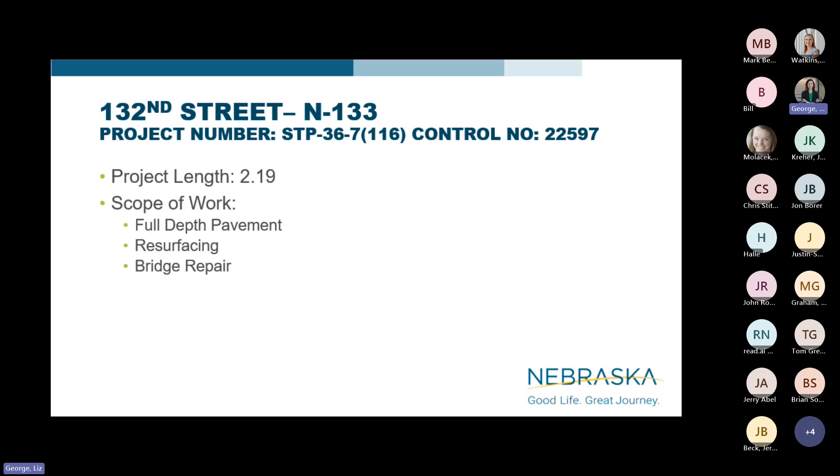132nd Street and N133. Looks like just a 2-mile project with full depth pavement as well as resurfacing and bridge repair. Potential conflicts would likely be with the full depth pavement, I think, on this one.

As you can see, we do have a number of utilities on this short project. I believe there's some culvert work on that project. Is there culvert work also?

The bridge over Thomas Creek, in the lower middle portion of that project, just on the south side of that S curve. I think we're doing some work down in the channel. Some culvert associated with that project as well.

Have to go back into the plans and stuff. But otherwise, everything from Thomas Creek to 133 is being fully replaced. And then everything to the west up through the curve is going to get resurfaced.

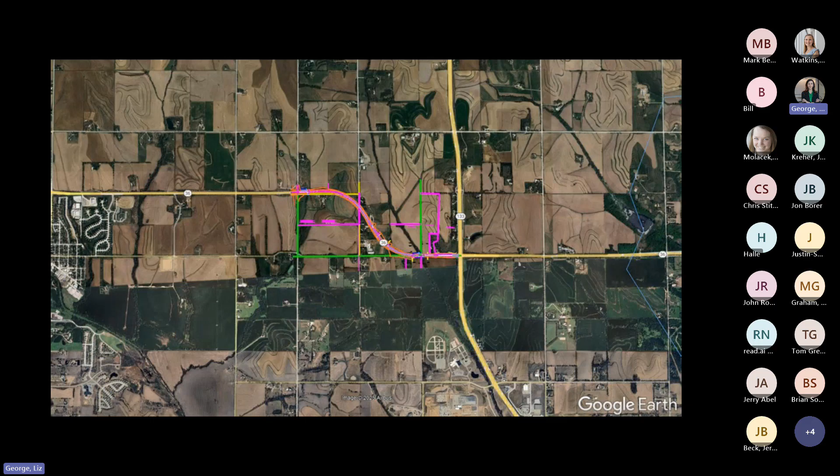This is Bill Wheeling. I apologize, I couldn't get to the meeting, but as Amy said, there's work in there. There's old piles, I believe, from an old structure. We're going to remove those piles out of there, and there was right of way on that project around that bridge area that we had to acquire for that work.

So, thanks Bill. Yep.

Next is D2. It's a high mast tower replacement project. So we've got ITS and lighting and grading. This one should be low impact.

I don't know if that one got updated. If you go to the map, is there? Looks like it. Okay. Oh yeah, this is the one that we updated because it includes...

3 intersections along 275. One up here further north on 275. And then there was one back here on 680, I think. Right, west, 680 West Center. Yeah.

Yeah, it said the first thing said 4 interchanges, but it's kind of... Yeah, because this one we just updated the other day to include those.

For those high mast tower projects, we're asking for really detailed locates. We have the ability, our contractor can field adjust the exact locations of where we have the foundations for the towers placed. We can move those around about 10 or 15 feet in any direction. So if you guys give us really good locates, we're going to do our best to plant our foundation where possible. But the new towers, they do have large foundations.

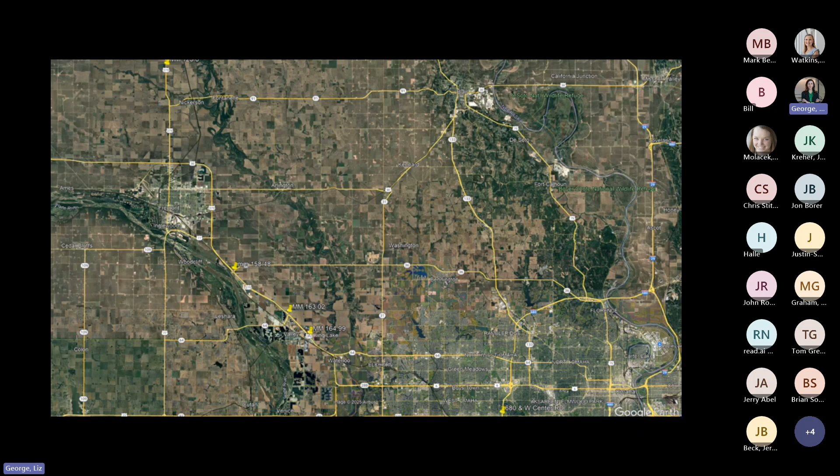Yes, the new towers have really deep foundations, about 8 feet. They're pretty big. I don't remember, 10 or 6 feet.

Specific to Dodge in Omaha, looks like we're 1.5 miles of full depth pavement. There's some grading and bridge repair. Be in the spring of 26. We do have a number of utilities on this one.

Is there a bridge replacement on this one also? Oh, this one. The last, Damon, do we have bridge repair and replacement or just repair?

The bridge over the Happy Creek just north of Pacific Street, just out of there, where that blue line is. That bridge is being widened in the northbound direction. They're only adding a single lane northbound, an additional 12 feet or whatever it is. That's the only work I believe that's being done on that bridge.

Short of any other maybe miscellaneous repairs, but we only prepared it and overlaid it recently, so.

But this is the one that's got the transmission line on the north end of it. Yes, this is the one that does have the transmission line over the approaches. Right, doing some modifications to our substructure.

And I think Kurt's still working with them on that, asking for that drop. OPPD has been working with us on how we're gonna handle that. It's that super high voltage transmission line that's serving a regional area.

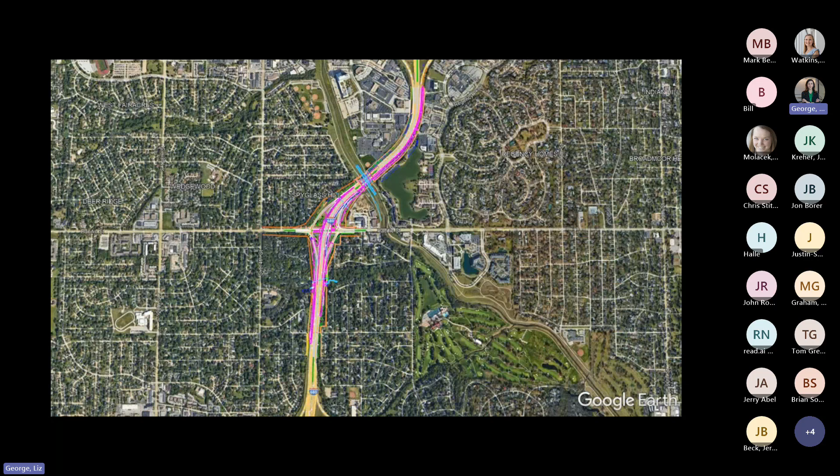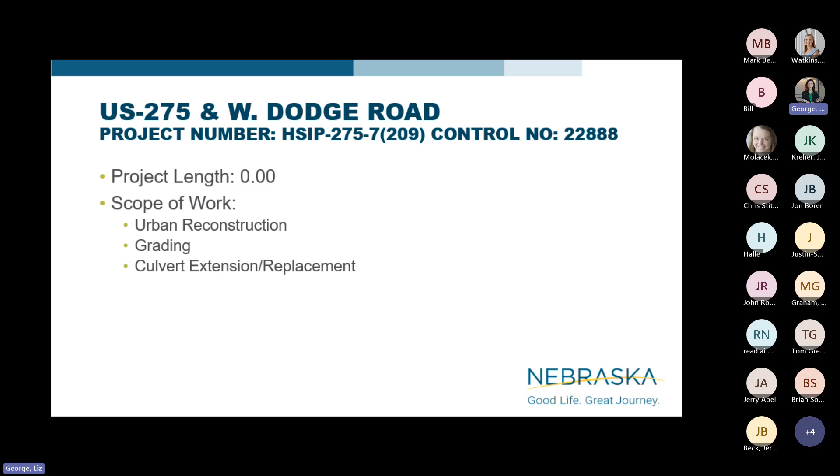Next, US 275, West Dodge Road. There is no length to the project yet. It's urban reconstruction, grading, culvert extension, replacement. We're going to be hitting that one late summer of '26. Not too many utilities on this one, so hopefully it should go pretty smoothly.

At West Dodge, there's going to be a roundabout at West Shores on the 275 and West Dodge, outside of town. I think we're actually looking to advance that potentially to give the contractor all summer rather than start in July.

Further in the spring, make sure we're on top of it, just to give them the most time. It's not anticipated to take a full season, but if we can start as early as possible and mitigate any weather issues, we're trying to do that.

Kurt Yeager is the District 2 utility coordinator in the office, so you should expect some correspondence from him about these projects if we haven't already talked to you about it. We'll get it to you soon.

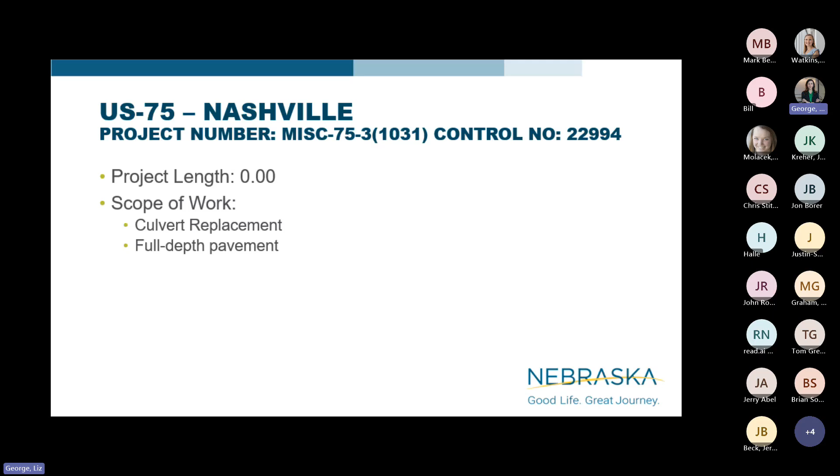This next project is a super exciting one. It's been added as an emergency repair very recently, a month or so. We had a washout situation where a culvert failed and there's going to be a need to rebuild it in a hurry. Unfortunately, there are a lot of utilities in the area, so we need to work together as quickly as we can to relocate your facilities.

It's not a huge area, but we don't have a map of it yet. It's certainly going to be high impact, and I think right of way is pretty tight there.

This is kind of a relic of the past. There's an old rail line adjacent to US 75, just north of the Washington-Douglas County line.

The culvert itself is just a small, I think 5x3 box culvert. It drains from both sides of the highway to just under the southbound shoulder, then goes into a chimney, like a collapsed chimney structure, and drains out into a creek using some old rail culverts. That vertical chimney structure is compromised and is causing significant washouts underneath the highway.

So that's why we're pursuing an emergency replacement. The hole itself has appeared twice within the last 6 months. It first appeared earlier this spring and then reappeared this past fall, right after Labor Day. So short of saying we get to next spring, this hole will reappear soon.

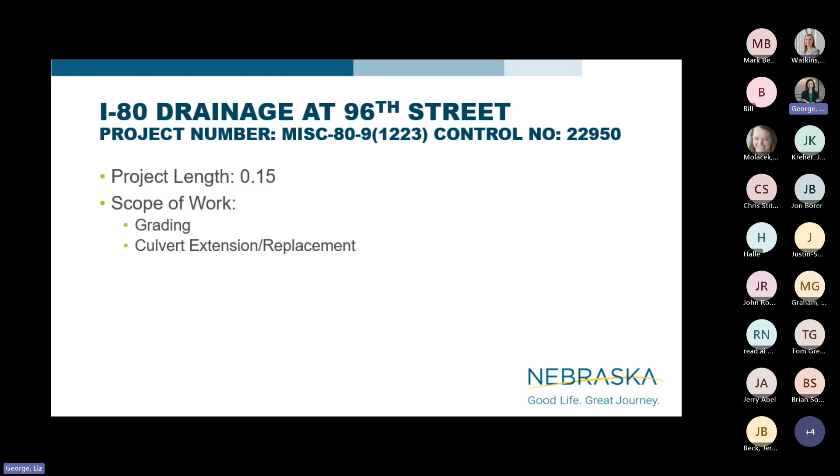Moving on to I-80 drainage at 96th Street. It sounds like we're going to do some grading and culvert extension replacement for the drainage, major grading, major drainage. This is another emergency project that the district is kind of pursuing.

We have some hangups with the railroad right now, but there is an exposed, compromised utility line up on the south end of the interstate, and we need to get this fixed as soon as possible.

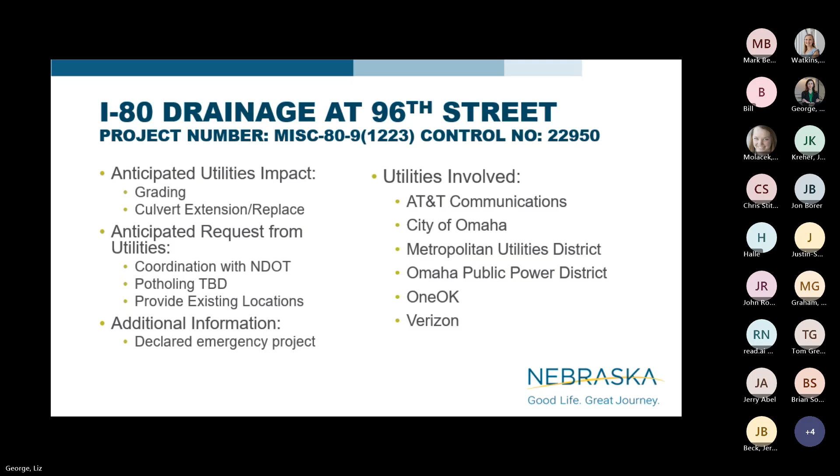That wraps up things going on in our next construction season.

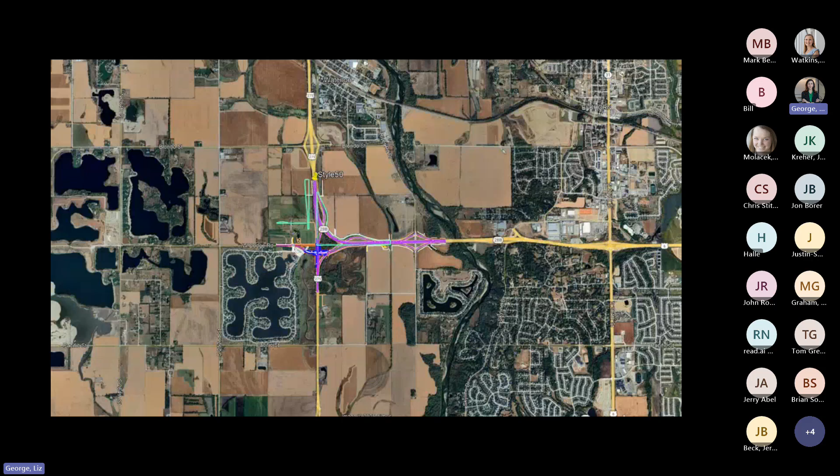Sorry, I have a lot of slides to click through. Up until Rawhide Road, so before Rawhide, yeah, there's only two.

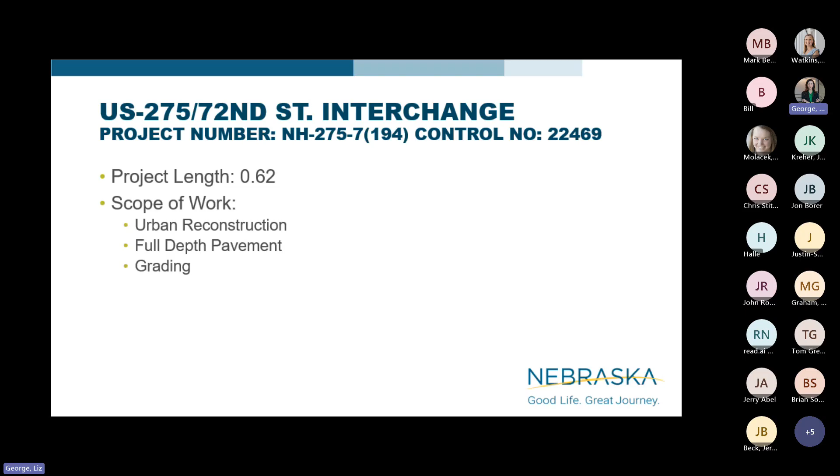The first one was US 275 and 72nd Street interchange. That's the one that's already started. The bridge demolition is scheduled in a couple weeks. Some extensive work is obviously happening with this one.

A lot of relocations have happened, some are in process. The second one was Millard Highlands along I-80, this is the noise wall along the north side of I-80, just west of Giles. That was the two.

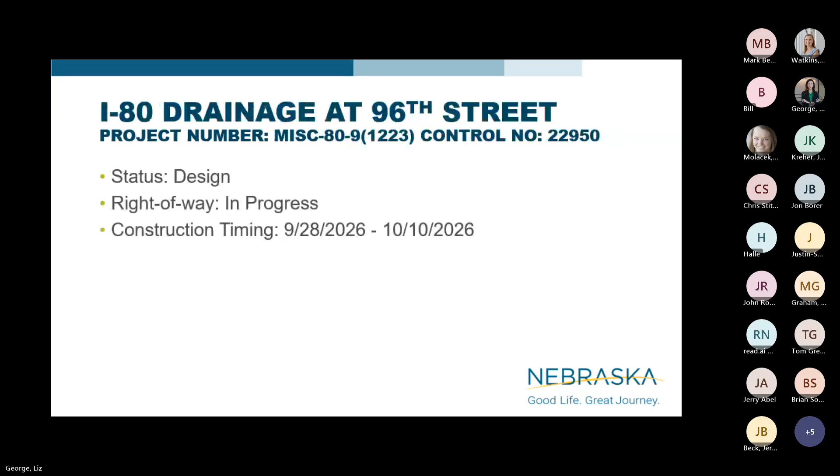I think the locations are relatively sporadic. I believe 370 has a significant portion, an amount of it. There was a lot of splice work that happened from the time we installed along 370 up until now, so I think that's restoring integrity to the line by putting new stuff in, getting it cleaned up. Other than 370, I think there's a handful.

Wherever we do have our fiber, we know you guys also have a lot of facilities too, so we'll be working with you to get coordinated on that.

Yeah, here's the map. You can kind of see the different areas that we're touching.

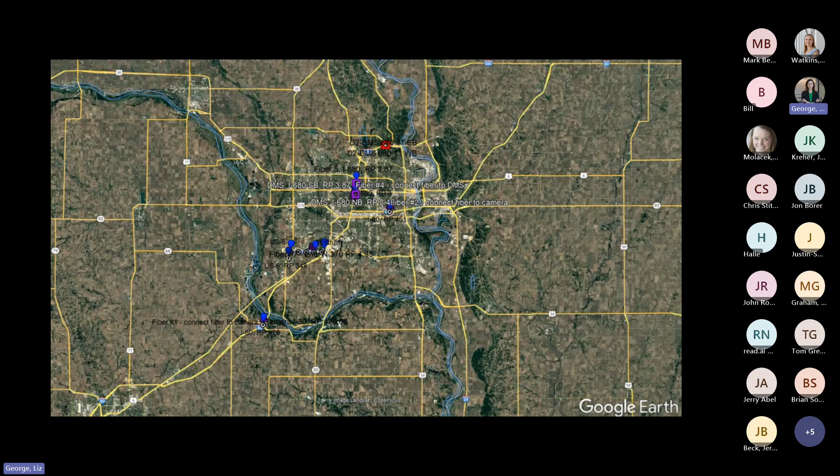Sorry, go back to slide 45. One more, one more, sorry. One more. Yeah, this one, that's 967. This one, there would be a little right of way involved. I have a note from Bill that says we had right of way on that one, but maybe that's not the right slide. No, it's not, this one doesn't have right of way. It was 22597, that was the one before.

132nd to N133. What Damien described about the bridge, we had right of way on that. That was a project a little ways back. This one won't have any right of way. Okay, sorry about that, Bill. Our slide numbers don't jive, I guess, so I'll be looking at these as we go.

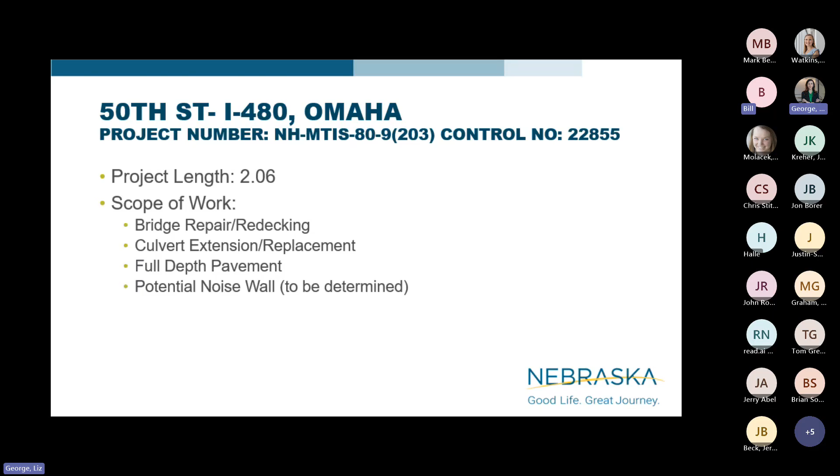Yeah, no worries, Don. This one, 50th and I-480, is a design build project that we have. So I don't know if things will be going on, I think there's going to be some tasks and that stuff going on at the same time since it's using that alternative delivery method. We'll know more about that as we progress with that project.

That's a good thing to note. Thank you, Bill. Design build projects are a little bit different than what we typically do. The design and the build kind of go more hand in hand and happen more simultaneously than our traditional way where we design a project, let it, and then it goes to construction. So it's bringing it all along at once. That's going to require a little extra attention to utilities as we move through.

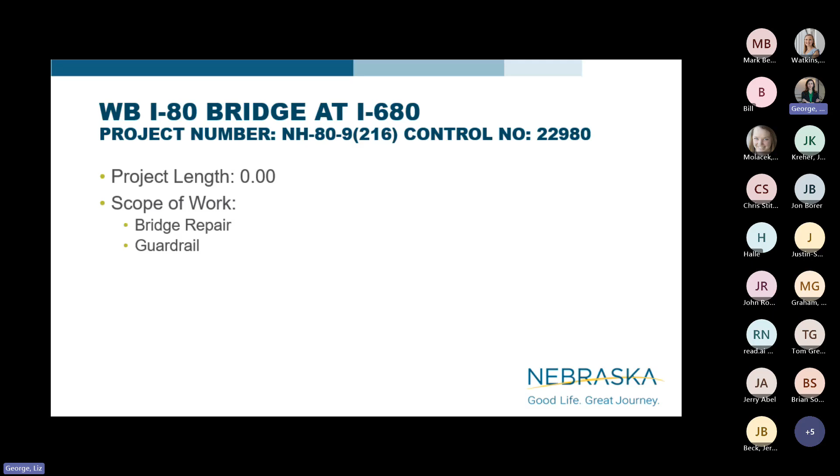Okay, here we go. You have a note on this one? Westbound I-80 bridge at I-680. Looks like we have bridge repair and guardrail on this one.

Currently an approach replacement project with some deck resurfacing, so there should be some minor issues. We'll have some new substructure work with the grading. I think there might be some lights, Damien, correct me if I'm wrong, there are some lights underneath the bridge illuminating the ramp that goes underneath it. I believe the power for that runs through the rail or something, so we'll have to take a look at that possibly. That could be an issue.

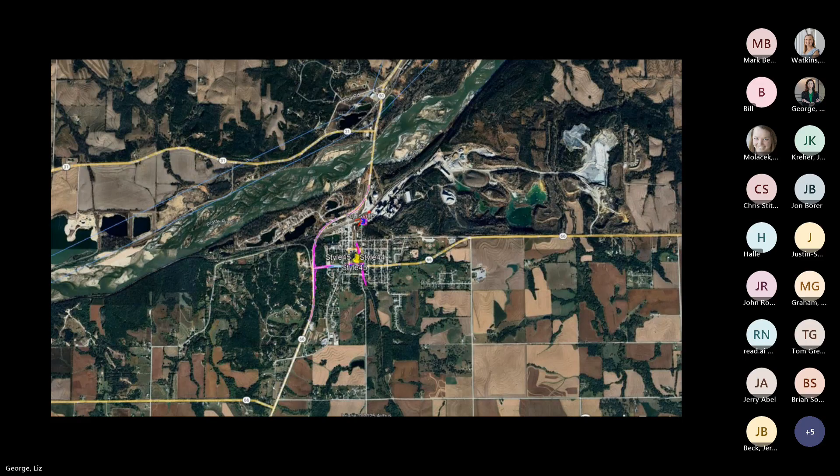This is a newly announced project, I-80 Sarpy County interchange. So at 190, I-80 192nd. Right now there's nothing in it, but it's an overpass bridge for a county road. We're going to be building an interchange there. So as those design plans come out, we'll know better the footprint of where that's going to go. But there are quite a few facilities in there.

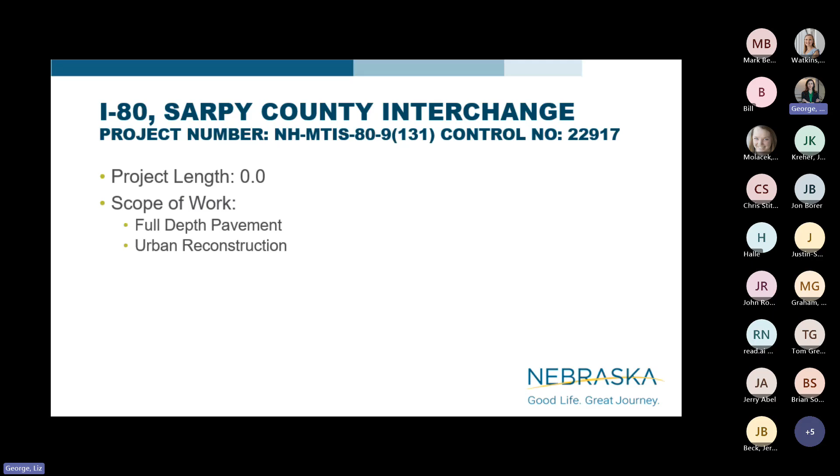This one is being designed by a consultant, and so with consultant jobs, you might get utility coordination from our consultants on behalf of NDOT. It'll be the same protocol as if you get a consultant project from us, the same notification packet should come to you, same filling out the questionnaire and letting us know. It's still our process, they're just going to be the ones delivering the message, I guess.

In conjunction with this project, our project itself is generally just the interchange, but any of the local systems that tie into this, any future improvements, everyone will need to be mindful of what needs to be looked at. A lot of this may be pretty fast moving once we break ground, it's a pretty big opportunity for development in that area. There's going to be a lot of work in Sarpy.

So, does anybody have any questions about any of the projects we've talked about so far, 26, 27? Anything? Going once, going twice.

We're going to step into a very brief preview of what's coming in construction year 28. This is 3 years out, 3 construction seasons away. Our goal here is to put these projects on your radar so you can plan for your activities and what potential impacts we might have to you. We're trying to communicate with you guys as early as we can to make it smooth for you and us, and we'll try to avoid knee-jerk reactions to projects.

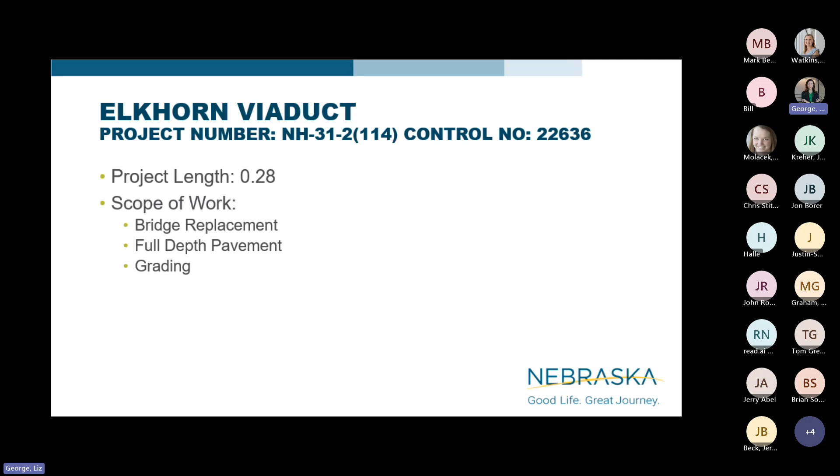Why? Elkhorn Viaduct. We're going to be doing bridge work here, full depth pavement, and some grading. We don't know when we're going to start the project yet, just thinking sometime in 2028. But there's definitely a lot of utilities in the area of the project, so we'll need to do some good coordination there.

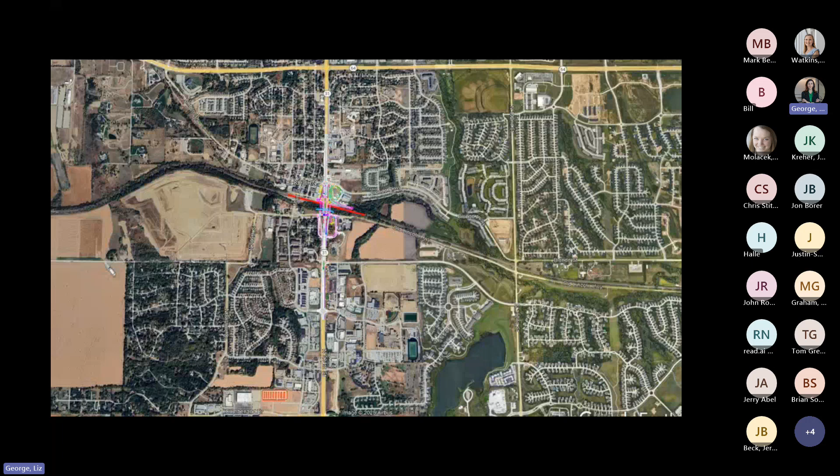And here's the map. Not a huge footprint, but dense. That was the only project we really wanted to bring to your attention for 2028. I'm sure there's other stuff in 28, but Elkhorn is the dumpster fire, so that's the answer on that one.

With that, does anybody have any questions? Anything we've talked about? Anything at all? Anything NDOT related or utilities related or project related?

Was N1 to Louisville in your presentation for 26? It was not, I don't think so. N1 to Louisville, the resurfacing project down in Louisville, all the way down to Manley. The big thing with that project is, yeah, it should be on the fact sheet. There's going to be a bridge redeck over the BNSF railroad tracks on the north side of town. There are overhead lines, I believe, either adjacent to or over the approaches. I think they're just distribution lines, but something to keep in mind. Need to get some of those with any substructure work.

Thanks, Damien. We're always open to questions. If you don't have them now, you can ask us later. We're happy to hear from you, happy to work with you.